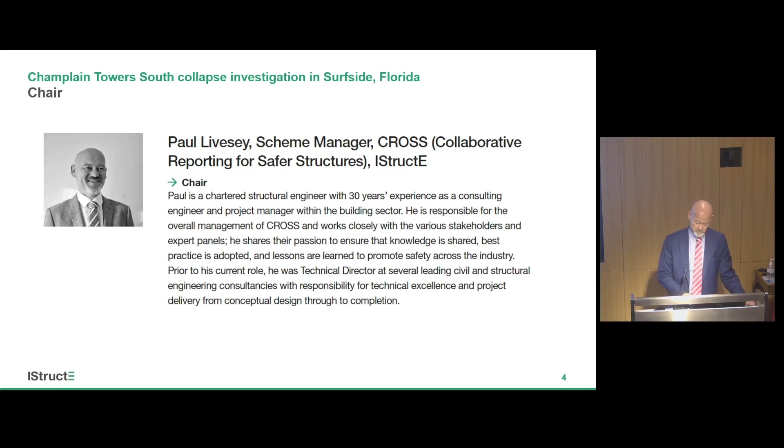CROSS is a confidential and secure reporting system that provides a route for professionals working with buildings and other structures to report the issues that they experience to enable lessons learned to be shared across the industry. At the heart of CROSS lies a strict no-blame culture, and we welcome reports about fire safety and structural safety issues, and these typically relate to concerns, near misses, and other incidents.

Our roots date back to 1976, and we were first established to identify in advance trends and developments which might contribute to an increased risk to structural safety. The CROSS scheme itself was first launched in 2005, and it's based upon the success of confidential reporting in the aviation sector. In response to the Grenfell Tower tragedy and the recommendations of Dame Judith Hackitt, the CROSS scheme was expanded in 2021 to include fire safety reporting.

This year, we were appointed by the Building Safety Regulator to operate the official voluntary occurrence reporting system that is required under the Building Safety Act.

CROSS receives voluntarily submitted reports which are then anonymised and de-identified to ensure that a reader cannot identify any product, location, company or person. The de-identified report is then commented on by our expert panels who use their experience to help professionals understand what can be learned from the report. Following a legal review and a review by the reporter, the report is then published for others to learn from.

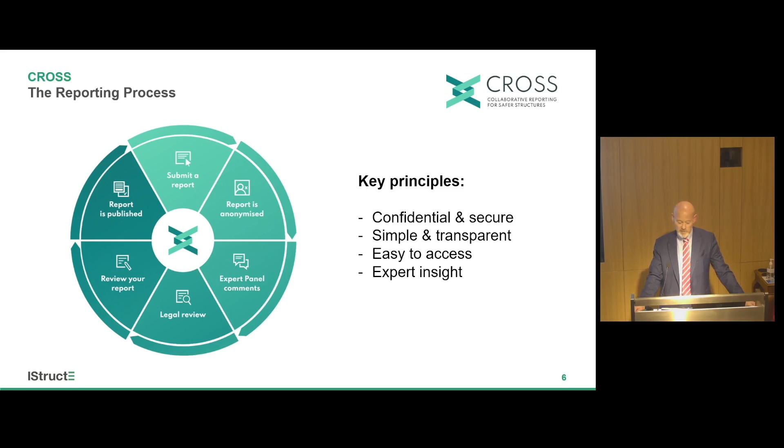We have over 700 safety reports that are freely available to view on our website, and we publish a quarterly newsletter that contains our latest reports. The receipt of a number of reports on a common theme could be considered as a precursor to a more significant event, and in these cases, we will issue a CROSS safety alert.

For example, over the years, CROSS has received a series of reports regarding balcony safety issues, and this, together with tragic events within the public domain, triggered the release of a CROSS safety alert. This alert highlights the common issues associated with the design, construction, and maintenance of balconies.

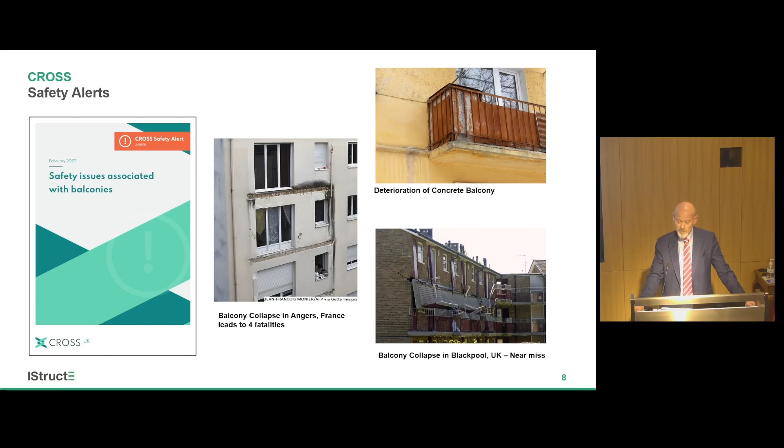Many issues that we observe also occur internationally, and CROSS promotes the sharing of lessons learned across our international network. We currently also operate in the United States and Australasia, and the country shown hatched is Germany, and the German Proof Engineering Association are currently in discussions with us, and we hope that they will come to fruition before too long.

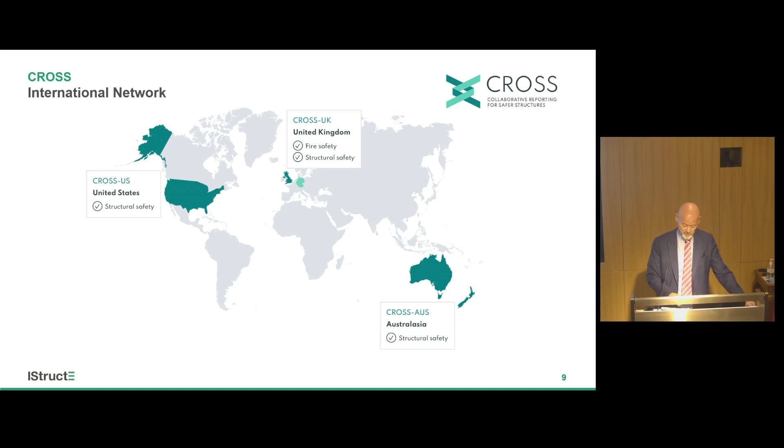So what are we learning from the reports that we receive over the 18 years that CROSS has been operational? I'm sure that many of these will not surprise you. The overarching lesson is that similar issues occur again and again.

There is inadequate communication, particularly at interfaces, and divided responsibilities. Tasks are being undertaken by those not suitably competent to perform them. There is ongoing concern about the degradation of older structures, coupled with a lack of maintenance. Changes in architectural or construction trends can have unforeseen consequences.

A poor understanding of computer analysis and design is a very common theme of our reports. There is a shortage of suitably qualified and experienced engineers, leading to safety-critical decisions being made by others. There is a lack of competent site supervision and inspection, coupled with inadequate quality assurance and checking. And added to the technical problems are the human traits of carelessness, corruption, and ignorance.

However, it is important to say that the vast majority of buildings are indeed designed and constructed safely.

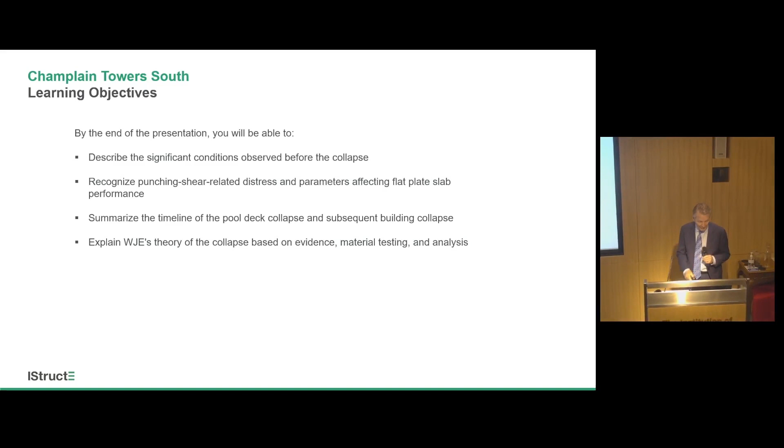By the end of the presentation, you should be able to describe the significant conditions before the collapse, recognize punching shear related distress, which may be very important, and parameters affecting flat plate slab performance, summarize the timeline for the pool deck collapse and subsequent building collapse, the progression of that collapse, and explain at least our theory as to the collapse.

If you permit me a brief commercial, I'm with Wiss Janney Elstner Associates. We're headquartered in Northbrook, Illinois, as Paul mentioned, but for about 7 years we've been in London. WJE is different than most engineering firms - our entire focus is on problem solving, usually based on instrumentation, testing, research, and detailed investigation. We're doing that same type of thing here in London.

I should also acknowledge our client. We were hired by the Condominium Association for Champlain Towers South through their attorney, Akerman, and Michael Goldberg and Brenda Radmacher did a tremendous job in that they helped coordinate the investigation for the civil litigation, because we had plaintiffs and other defendants all interested in carrying on an investigation, and the association was kind of in the middle of that, and they did a terrific job. The fees were ultimately paid by James River Insurance Company, and their attorneys were involved, Clyde and Company. We want to acknowledge them as well.

And also the WJE staff - I'm here representing them, including Matt Fadden, my colleague who really led this investigation. I took the initial call, but he's from South Florida and did a fabulous job, and there were a lot of man hours in field investigation, document review, structural modeling, and geotechnical consulting.

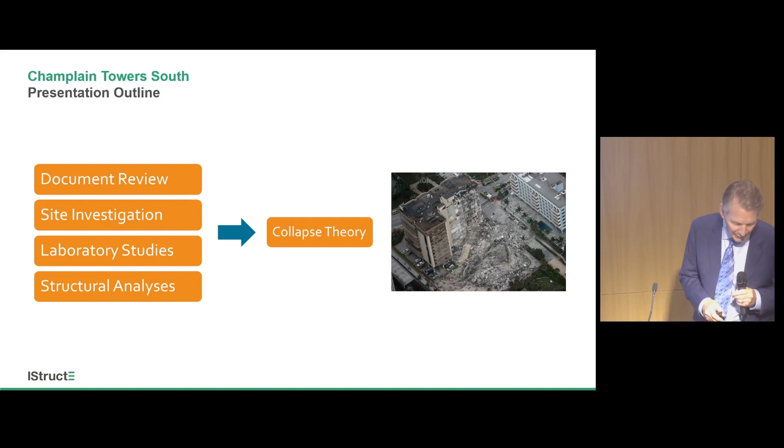Today's presentation follows kind of the steps in the investigation, right? Starting with document review - and that's not just construction documents, that's everything we could get our hands on, including photographs and other things prior to the collapse. A site investigation, limited laboratory studies, and structural analysis, all leading to a theory of the collapse.

All right, so let's start with document review and some background.

The building is in Surfside, Florida, north of Miami Beach, in that circled area—a very nice area becoming more high-end every day. As of the time of the collapse, on June 24th, we knew a building collapsed at about 1:30 a.m. About 100 people were feared missing or dead. The cause wasn't clear at that time, but there was a lot of speculation in social media, and a lot of information, including the permit drawings, was made publicly available.

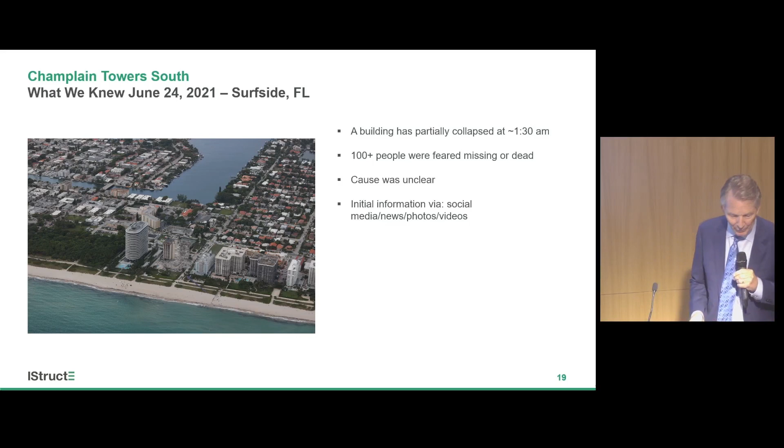The collapsed building is in the middle of that picture. To our left is 87 Park, and to the right is what's known as the Blue-Green Resort. I may refer to those buildings later in this presentation.

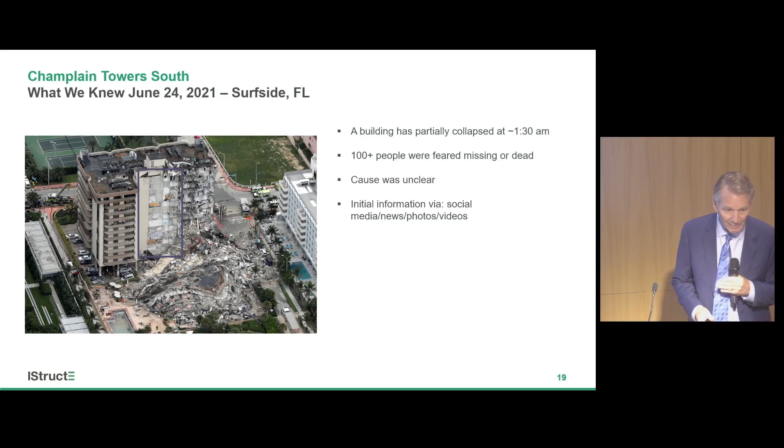The building was designed in accordance with the South Florida Building Code, the 1979 edition, which in turn references the 1977 edition of the American Concrete Institute Building Code Requirements for Reinforced Concrete, also known as ACI 318.

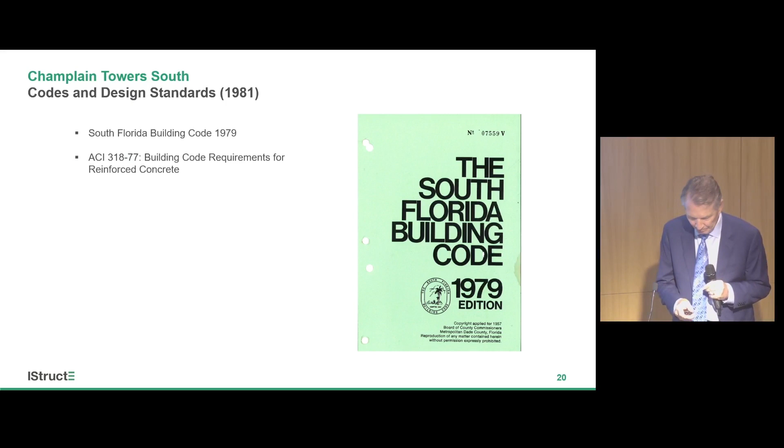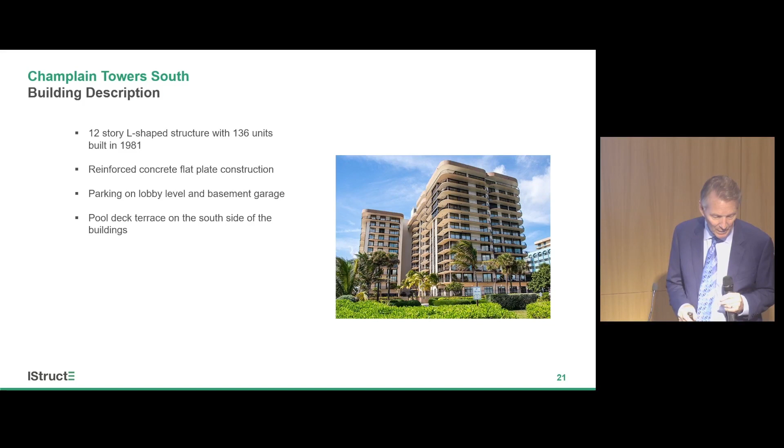The building was 12 stories, L-shaped in plan, 136 units, built in 1981. It had reinforced concrete flat plate construction—this is a shot of what we'd consider flat plate construction, a flat slab without drop panels or capitals. We define that as flat plate. I understand your definitions might be a little different.

There's parking at the lobby level and the basement garage, and there'll be more slides to explain that, but this shows the basement level garage, which covered the entire site, not just the building footprint. That's important to understand, and I'll show some slides on that.

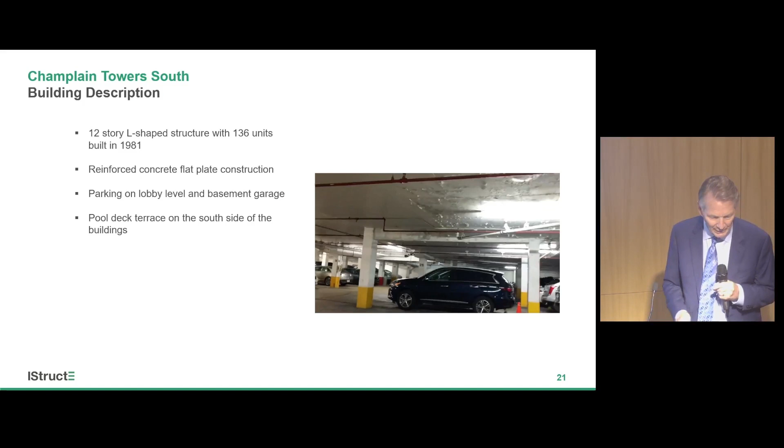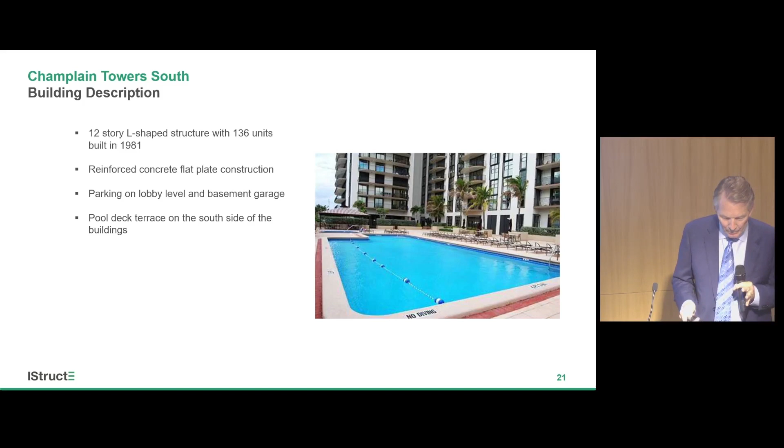That's the pool. It looks huge there, and it's a sizable pool, but the pool deck was much, much larger, as you'll see. The pool deck is where we're going to talk a lot about.

So there's an overall plan view. Collins Avenue to the west, the Atlantic Ocean to the east, and you can see the perimeter of the building and the pool and the deck surrounding that pool, okay?

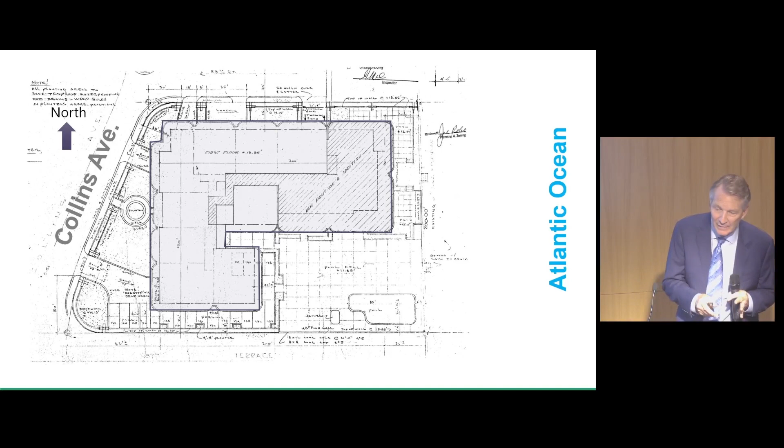If I take away the overlay, you can more clearly see that the building footprint was smaller than the site footprint. The next slide you'll see is one level down. There you see there's parking in the entire perimeter. So the pool deck is a supported slab, all right? Remember that.

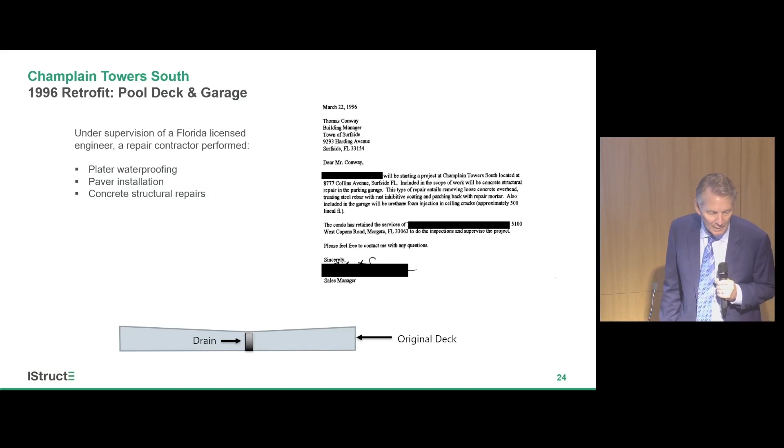As part of the review, we looked at the history of what went on in 1996. There were fairly significant activities where they added sand and pavers to the pool deck. There was an engineer who wrote a letter, but this work was primarily driven by a waterproofing consultant. The pavers looked great, but they added weight, and they also concealed to some extent any underlying structural damage.

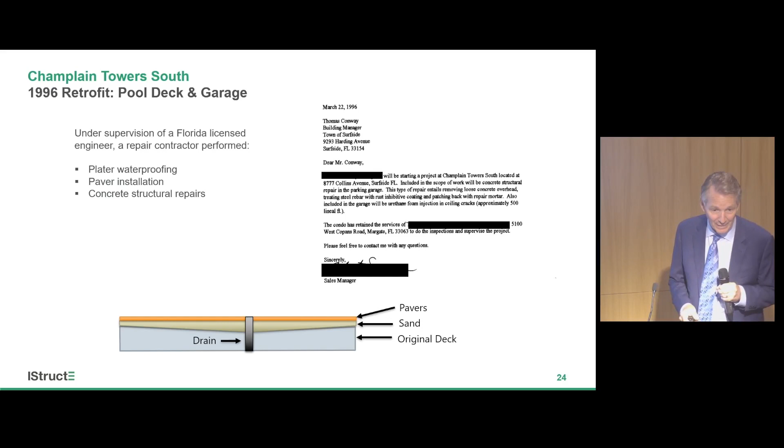In 2018, they began a recertification effort. In Florida, you have to recertify buildings after 40 years, which means you have to hire an engineer, they have to do an inspection, do repairs, and certify that the building is safe for continued use.

So we had the benefit of that completed report, even though the repairs were not completed. There was the usual mix of damage, as you might expect in a coastal environment after 40 years—abundant cracking and spalling in the garage, and previous repairs weren't holding up too well. A lot of concrete repair was needed, even in certain areas around the entrance along Collins Avenue, and even the pool deck slabs showing distress were recommended for removal and replacement.

I want to talk about the deck finish. One of the things the recertification engineers investigated was what was on top of this pool deck, because it wasn't entirely clear from the drawings.

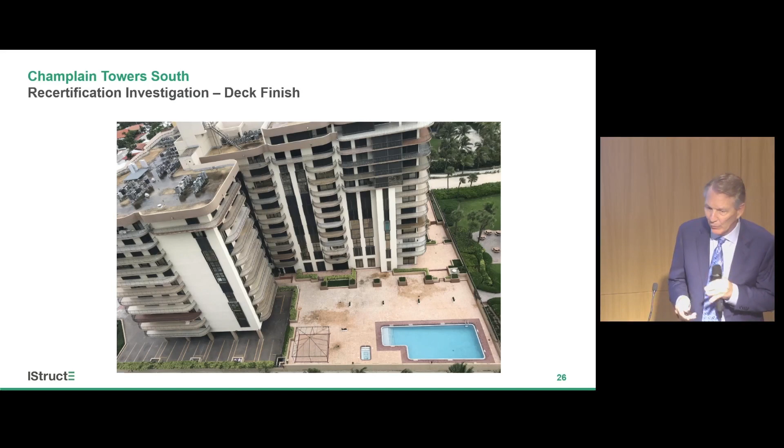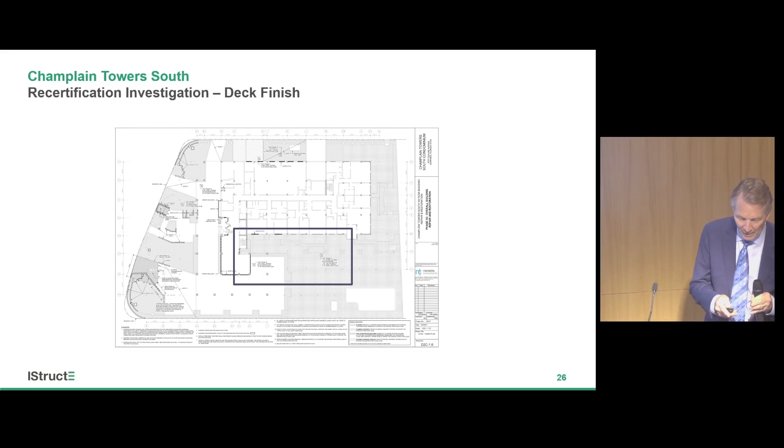So there you see the pool deck, and here it is in plan view, with a closer view of this portion. I'm showing it to you because they took cores, just two cores, but they were very valuable in understanding the nature of construction. One was through a parking area above the main subterranean parking, which had a grade level parking area - that's test core B. Test core A was through the pool deck itself. The next slide will show those cores.

A few observations on these cores. On the left is the core through the parking deck, on the right through the pool deck. What's missing from the pool deck core is the sand layer and pavers - they're not part of the core.

But the parking deck showed a topping slab more than 3 inches thick that was not shown on the original drawings. It's not clear if the structural engineer was aware of it. When I say original drawings, we think it's a permit set, so there was a possibility of changes down the line and even design changes.

Looking now at the pool deck slab, there was also a topping slab that was below the original tile and mortar, which was part of the original architect specification. So we knew that at least the construction team was aware that they were adding load in the form of a topping slab on top of the structural slab.

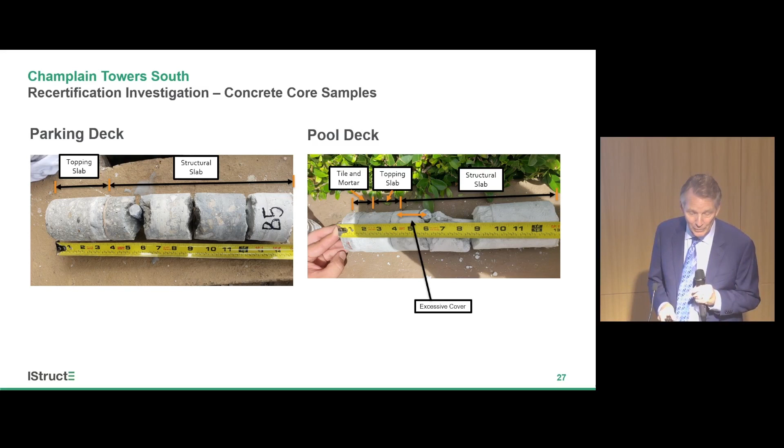The overall slab thickness was about right, but the rebar, not so much. There was excessive cover over the top reinforcement, which is not unusual in flat plate construction in our experience for various reasons. But that becomes very important too, when we get into a discussion of punching shear strength.

But what about this extra weight? By extra, I mean that's not shown on the permit set. In the case of the parking deck, they had some 90 millimeters of topping slab, more than 3 inches, that were not shown on the original structural drawings. And they had a 55 millimeter topping slab in the pool deck area, and on top of that, an additional 35 millimeters or so of pavers and waterproofing. So those items added weight.

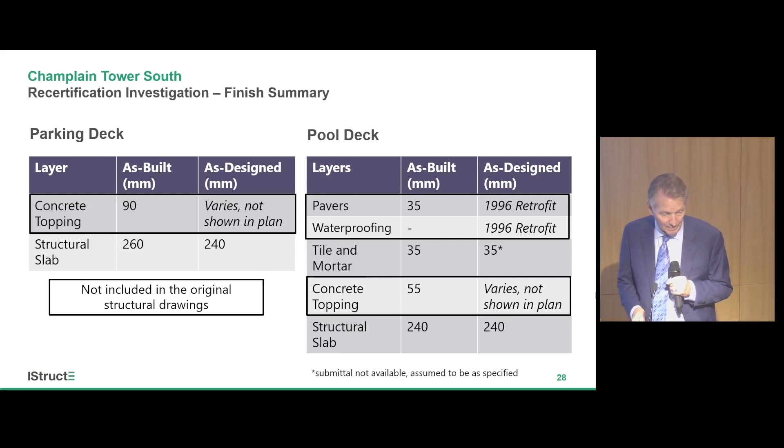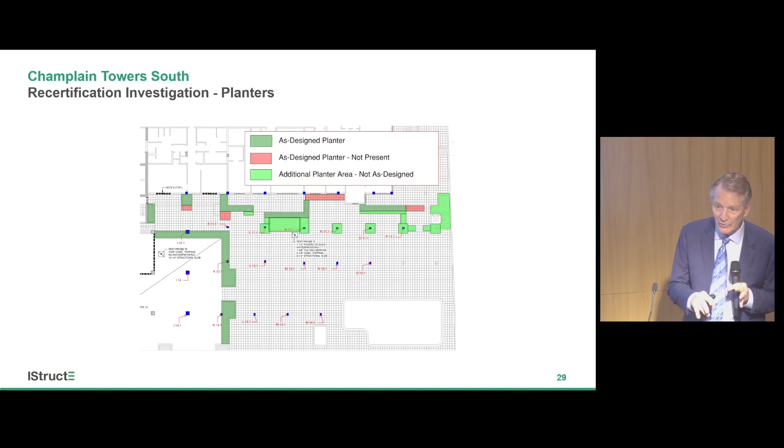And the planters weren't the same as shown on the original drawings. The planters shown on the original drawings and still in place are shown in dark green. As-designed planters that were not present are shown in a pink color, and added planters are shown in that light green color. So several planters were added compared to the permit set of drawings, which added weight in some areas, okay?

In looking through the mountains of documents, we came across some calculations that the recertification engineer did. Mostly in these recertifications, they do a visual inspection and fix what they can see is wrong. But at the entrance area along Collins Avenue, they were going to reconfigure the entrance, so they had a different drive pattern, different trucks could enter, so they needed to do some structural analysis.

So they undertook a frame analysis along column line T, a north-south column that you can see there. They looked at bending and shear for that area of the entrance, which is supported above the existing garage. The next slide shows their own output, and there were 10 supports along that line, and at the far right, it shows the results of the shear stresses at those supports.

And of course, the word exceeded appears in every case. So that was a clue, if you will, to the recertification engineer that there might be a punching shear deficiency at the grade level at this structure.

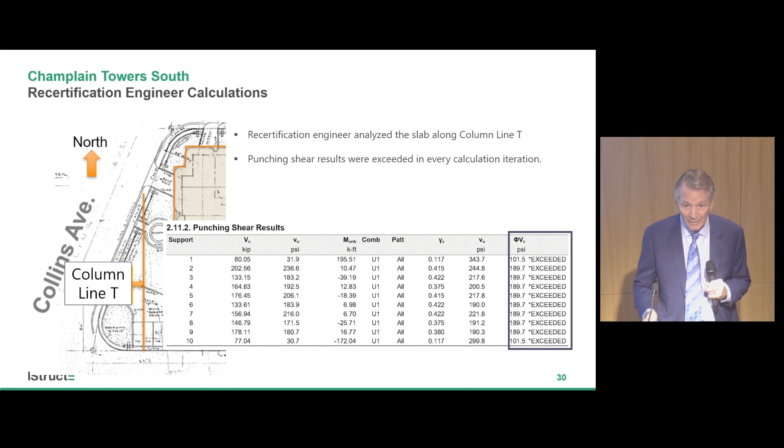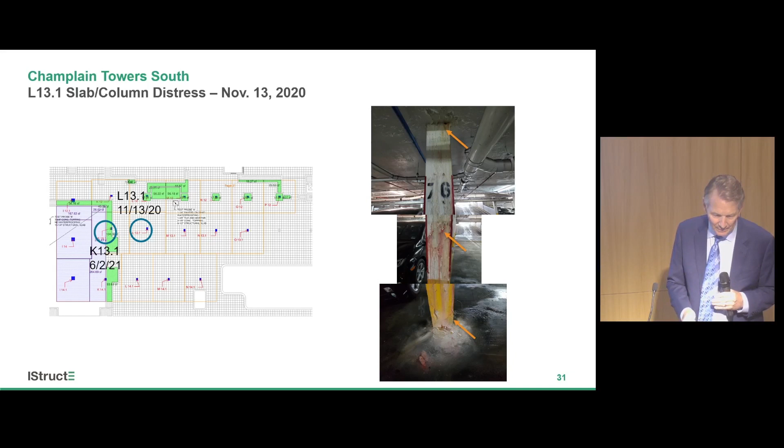It was column L13.1, and I want you to notice the mineral deposits at the base of that column. They're quite extensive, and there was evidence of a lot of leaks at the slab-column junction. The possibility is when there's more than just typical cracking - when you have cracking and punching-like distress - there's a pathway for water to enter.

In cases where you have exposure to water, accumulation of a lot of water might be an indication of a punching deficiency, and certainly an indication of cracking around the columns. But I'm not sure many engineers would fully appreciate that.

But if there was a smoking gun, it was when we discovered this picture. What you're looking at is the pool deck next to some planters, looking south, right above column K13.1. Those planters were constructed with concrete masonry units—what you might call concrete block, or cinder block.

The cracking pattern is consistent with distress of the underlying slab. You get a horizontal separation along the horizontal joint in those concrete masonry units, which suggests sagging of the slab, and there's a lot of deflection in this corner.

That suggests a problem with the underlying slab. The recertification engineer was aware of this cracking problem, but attributed it to something going on with the planters themselves, not the underlying structure.

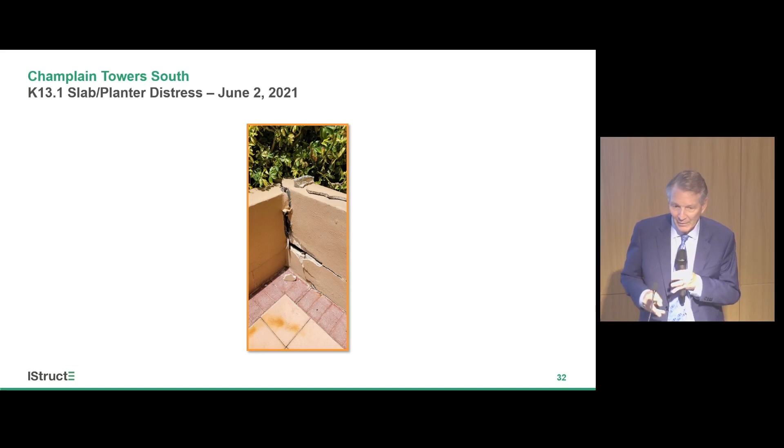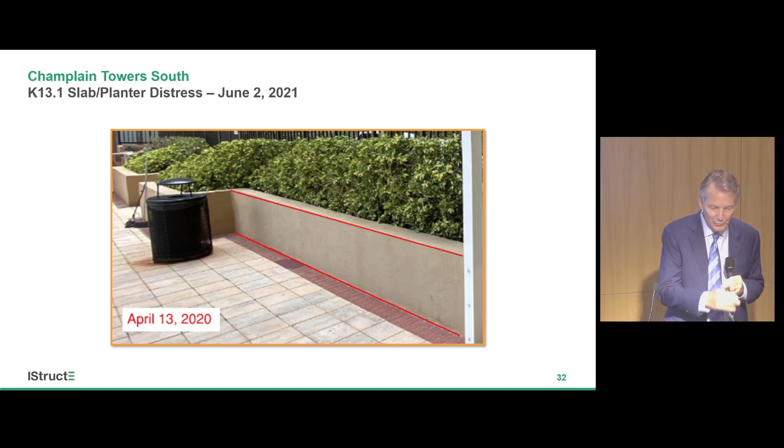What makes it more significant is we have a picture from a year earlier of the exact same location without that distress. So something happened between April 13th, 2020, when that earlier picture was taken, and June 2nd, 2021. Somewhere in that window, this distress occurred.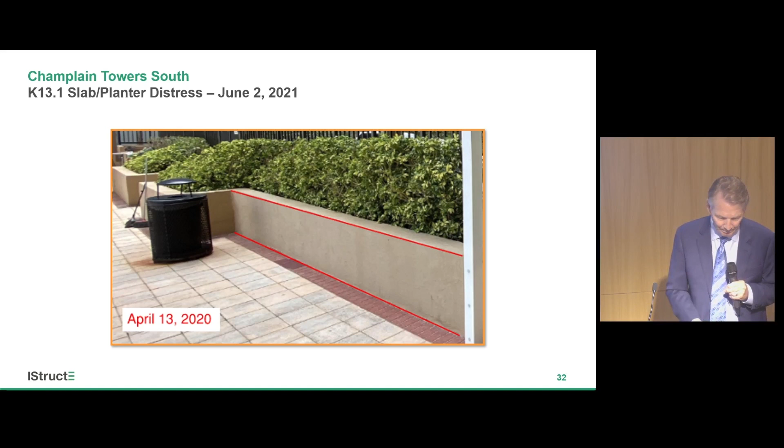Remember, June 2nd, 2021 was only three weeks before the actual collapse. This is a shot of the same area after the collapse—that green is the planter. You can see some of the concrete block units for the planter, and a column that had punched through the slab at that location. More about that later.

We knew some things from the video taken of the parking area. Remember, this parking area covers the entire site, not just the building footprint. To the right is the area below the pool deck, and to the left is the area below some of the units. You can see evidence of moisture penetration extensively in that area to the right.

Also note there's a change in elevation. It's hard to tell, but the electrical and plumbing lines are a clue that there were actually steps in the slab at those locations. And that plays in, as we'll discuss.

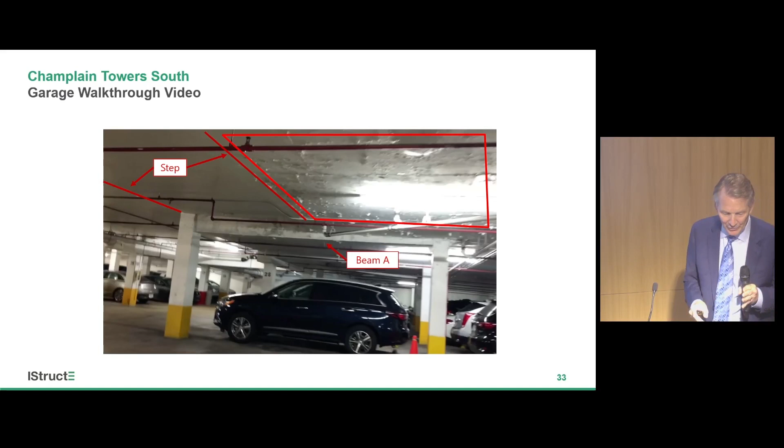I want to mention in particular beam A. To help deal with those steps, they needed a beam. So they put in these beam A's that transition from the building to the columns along the south side of the main building, if that makes sense.

We had some video—it's amazing how many things are captured on video. Remember I talked about the Blue Green Resort, to the north of this building? There were some guests there who heard or felt a whoosh of air come out through what was the entrance ramp to the Champlain Towers parking structure.

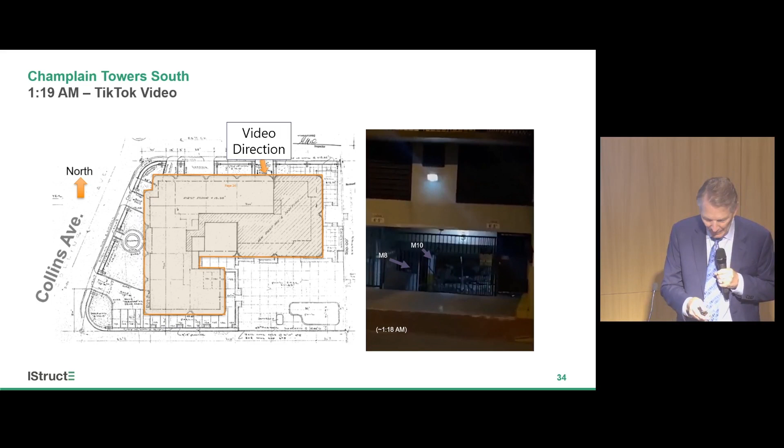So they got their video camera and took the shot shown at right. It's hard to wrap your arms around, but they're looking down the parking ramp underneath the building and into the pool deck beyond. When you enhance that photograph, you see the building is standing, but something terrible had happened to the pool deck area beyond—a lot of collapsed debris, possibly failed columns, and so on. So we had that video evidence.

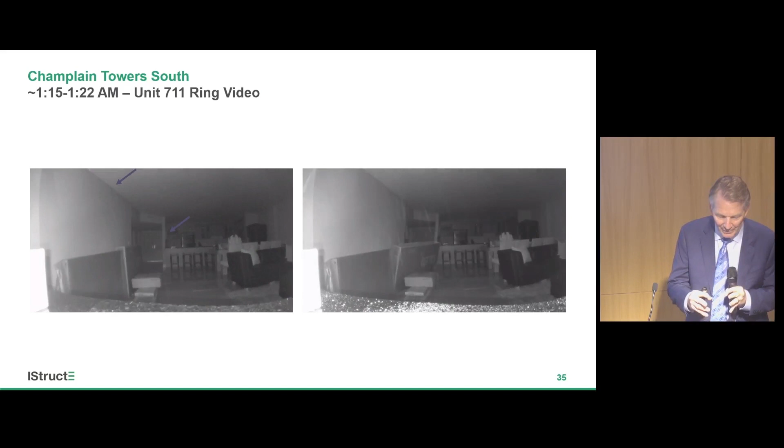We also had evidence from a ring video at Unit 711, and I'll explain where 711 is. This ring video picked up motion around 1:15 to 1:22 a.m. showing severe distress in Unit 711, but it's not collapsing at that time—it's just showing a lot of distress. Something went on, and we'll explain that later.

So that's where Unit 711 is—above, on the south facade, at the junction between the pool deck and the building. In Unit 611, residents reported cracks in the walls and escaped, as did those in Unit 111, who also got out safely. They were right at what we believe is the initiation point of the collapse of the tower itself.

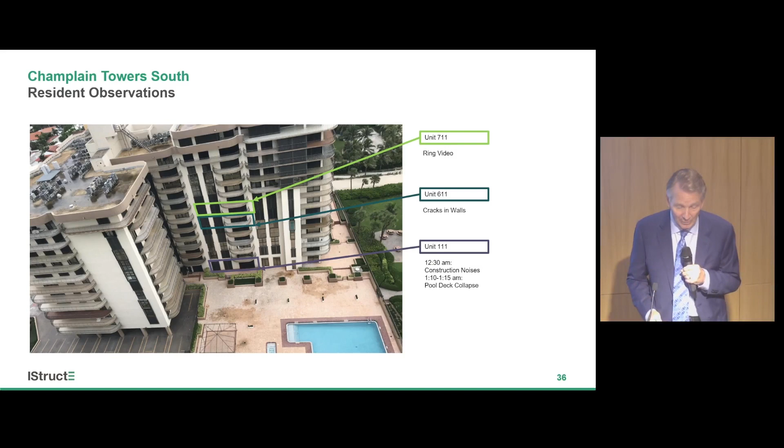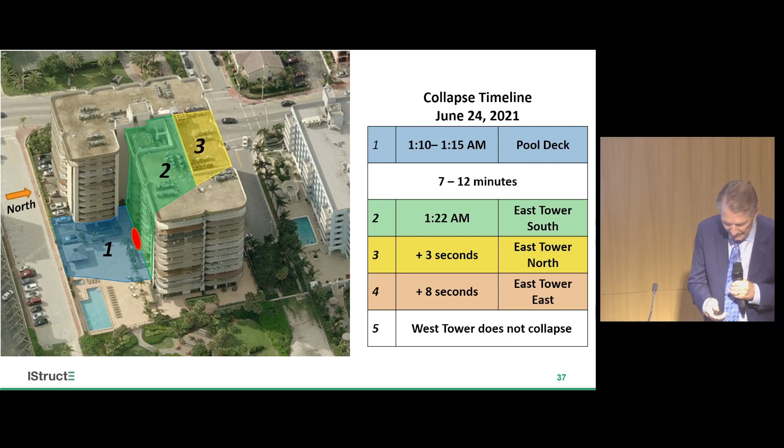So we could reconstruct a bit of a timeline from all of that, color-coded here. The pool deck collapses sometime between 1:10 and 1:15 a.m., based on eyewitness reports, 911 calls, those kinds of things. Then there was a gap of some 7 to 12 minutes before the south portion of the eastern tower collapses, beginning at the bottom, which we know from a video taken from a neighboring property. Three seconds later, area 3, the north portion of the east tower, collapses. There was a delay of about 8 seconds before area 4 folds in on top of areas 2 and 3. Area 5 doesn't collapse - there's a shear wall between the east and west portions, so the west tower does not collapse. Keep that timeline in mind.

We were eventually allowed access to the site after a frustratingly long period of time. Initially, appropriately enough, the Miami-Dade police department took control. It was a crime scene, and they didn't even allow the NIST investigators on originally, and certainly they weren't interested in any consultants coming on behalf of the litigants. So we weren't able to get to the site until October or so, and at that point they demolished the west tower and cleared the site. So this is what we had to work with in terms of a site investigation.

But it was still very valuable, and one of the first things we did, with the help of our client, was organize a joint testing protocol, so that all these defendant parties and plaintiffs, who all wanted to do testing, agreed on just doing it once. We hired a firm to coordinate all that.

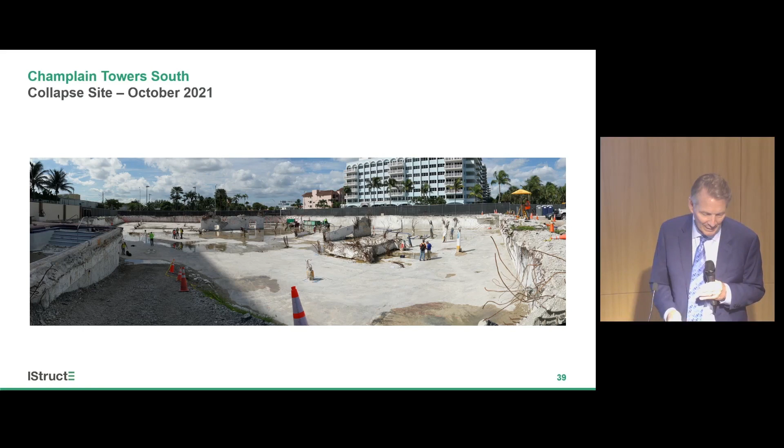One of the first tests we did was an elevation survey of the lower level slab, because there's a lot of speculation in South Florida, due to the karst formations, that it was a foundations problem. There are contours there, but those contours are in inches, and there's just not a lot of difference in elevation across the building footprint, particularly not very much from column to column, such that subsidence of individual columns was not indicated. There is a low spot in the southeast corner, but there was a sump there for the lower level slab, so it was sloped to drain. So we didn't really see much indication of foundation problems.

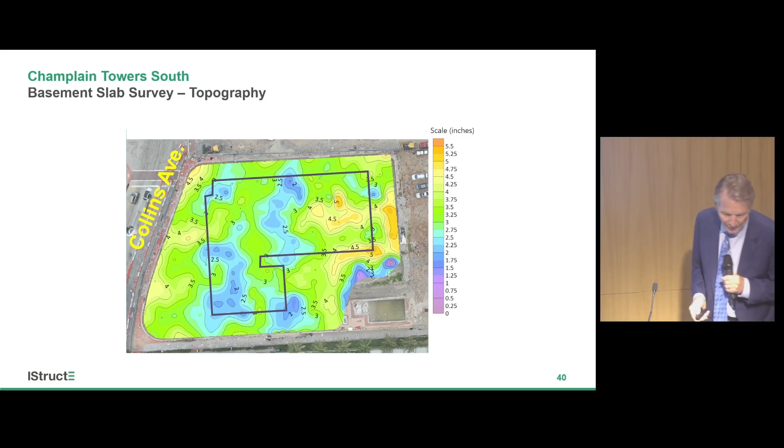We did extensive geotechnical investigation and didn't uncover any such evidence, along with sampling of concrete. We took samples of the concrete and the reinforcement, as shown here, and even did things like openings to look at waterproofing and the like.

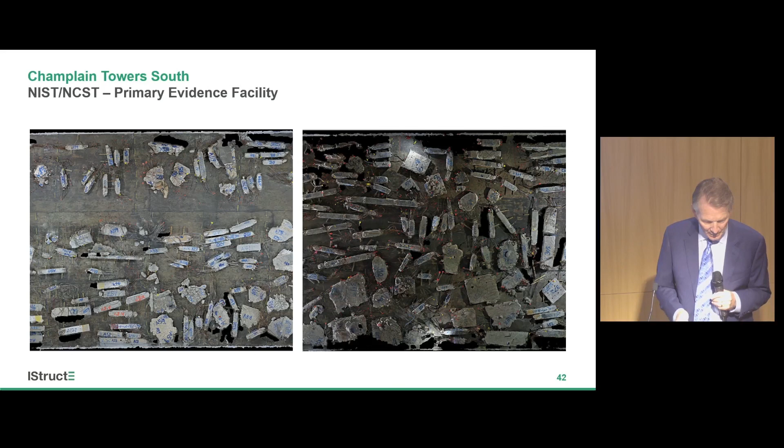In the meantime, the evidence was collected by the police department in cooperation with NIST and stored in a warehouse out near the airport - these are the pieces they collected. We were finally allowed access to look at these pieces, and we flew our drone and merged the photographs together to get a collection of all the pieces. They all had numbers on them, but nobody had correlated the numbers with the location in the building. So we had all this evidence, but didn't know specifically where it was from. That was a challenge.

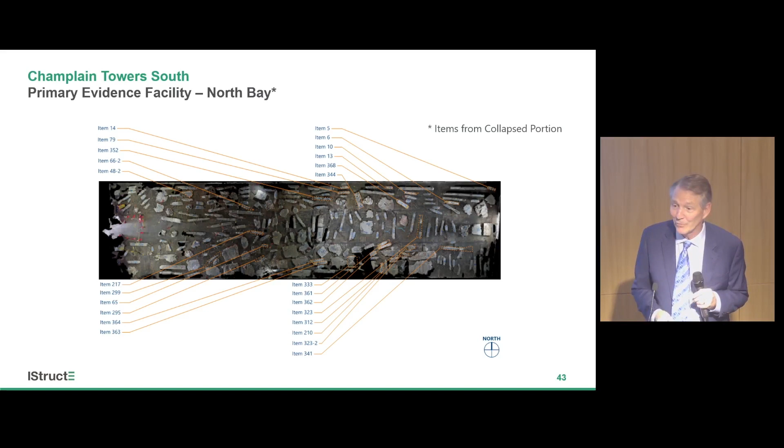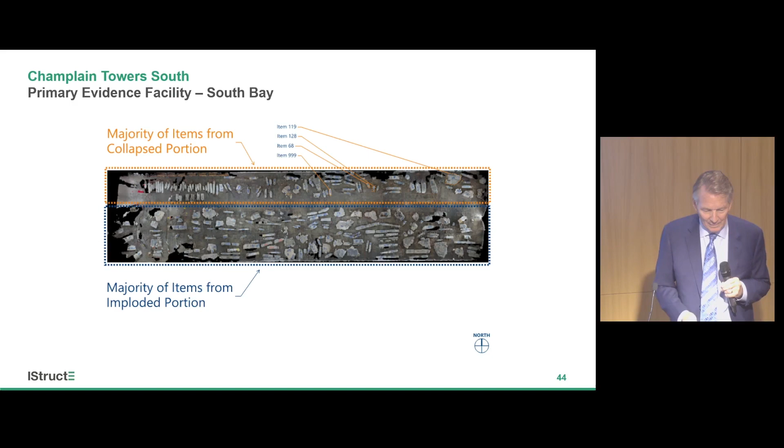I think NIST kind of knew, but what we heard was, rather than give you the wrong information, we'll give you no information. But we did learn some things. They also saved some pieces from the imploded portion of Tower South in a separate part of the warehouse, which is shown there. This is one of the most important pieces.

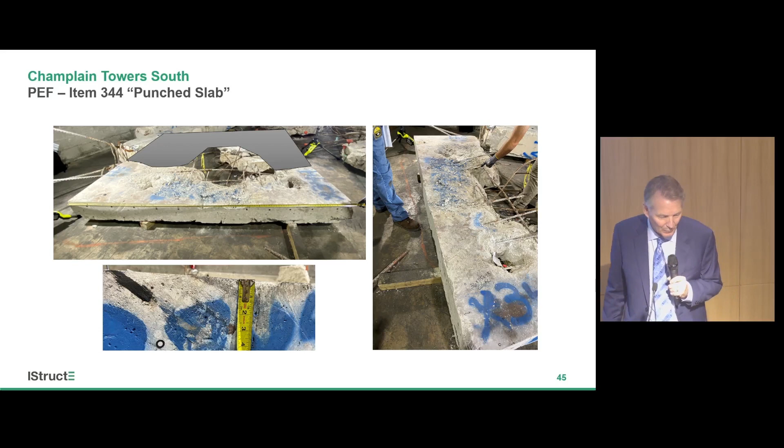We could recognize it as a pool deck column based on its various characteristics. There was no column above, and there was an apparent punching failure - you're seeing kind of half of it. If I complete that area around the column, it would look something like that, with a punching failure right in the middle. A couple of things I want you to note: not a lot of reinforcing.

What reinforcing was there was a little bit too deep, just like we saw in those core samples. It was 2.5 inches to what was the bottom layer, and if you superimpose where the top layer should be, it was about 1.25 inches - let's say 30 millimeters or so - of excess cover. As you will see, that's important to punching shear resistance in Eurocode as well as in the ACI code.

And they recovered some columns that were clearly pool deck columns, and some of those even had the parking numbers on them, so we could identify where they were from. That was helpful.

And that failure pattern, in our view, was consistent with a punch-through failure of that column.

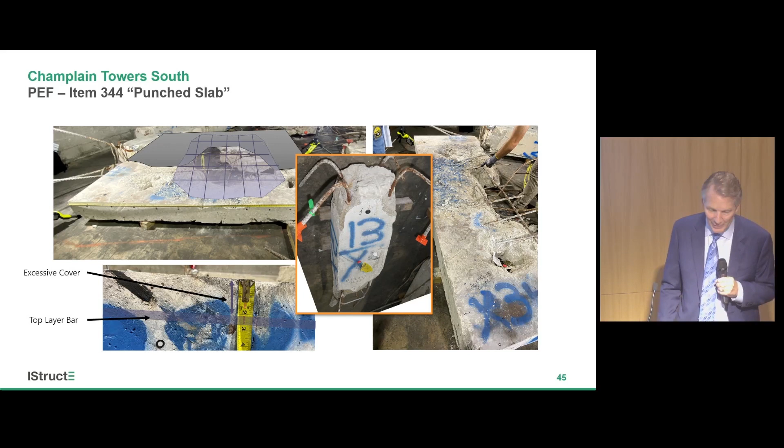We were very interested in beam A. Remember, that's where they used a beam to help facilitate these steps in the slab, and thought that would be a real hint as to how the collapse progressed into the main building. The beam A's were pretty much destroyed. You can see one example, but all we could do was confirm that the reinforcing was consistent with that shown on the drawings, but we don't know how much damage was due to the collapse itself versus pre-existing damage.

And likewise, certain columns into which beam A framed were found, not in the critical area where the collapse initiated, but elsewhere between the building perimeter and the deck area. A couple of observations are important here.

First, as shown on the left, there's a huge chunk that has been pulled out of that face of that column. We've shown kind of where the rebar should have been, and it was pushed in quite a bit. One of the things about these columns: they were not all that big, and they were very heavily reinforced.

Nominally almost 7% reinforcement. But then when you splice 7% with 7%, you get 14% reinforcement. That's a lot of reinforcement in a column, and they didn't use offsets to splice them carefully, so they ended up with this excess cover, which made these columns vulnerable to those kinds of breakout failures.

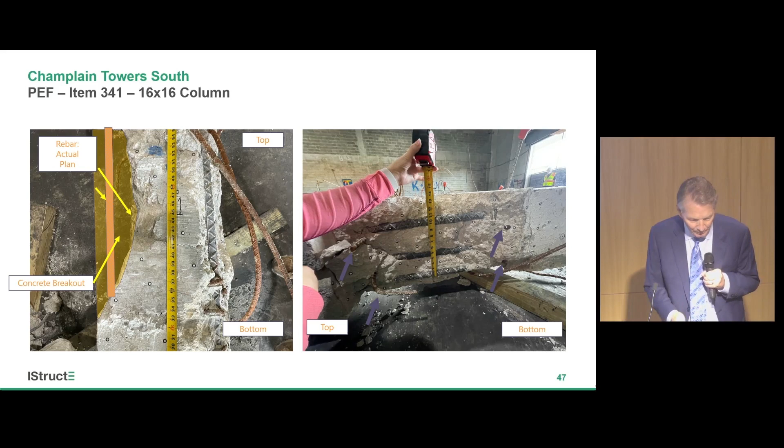Okay, now moving on to laboratory testing. This is from the Joint Testing Protocol. I'll just kind of go into the findings.

The concrete was typical to Florida. Moderate water cement ratio, well mixed, not air entrained, which was not unusual for South Florida. The corrosion of the reinforcement was consistent with that at placement. In other words, you put these bars out in South Florida and they rust. You put concrete around them and they stay rusted. But we didn't see much corrosion beyond that. Even back to that slab sample I showed you, you didn't see characteristic delaminations that you might get at a top mat, for example.

And the chloride levels — these are mostly samples from the basement slab, not from the pool deck slab — but they were very low. You see the carbonation front in the photograph to the left, and it wasn't terribly deep. So nothing from a materials standpoint stood out.

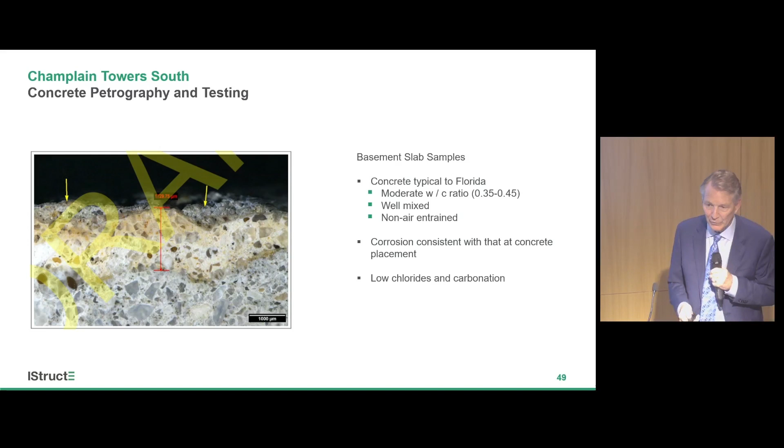We did have a chance to test cores, some from the pool deck, where the average compressive strength was 30 newtons per millimeter squared, which exceeded that specified, not by a large margin. Concrete can gain strength over time, but it certainly didn't indicate that concrete strength was a major factor. There were a couple of columns where the measured strength was lower, but we don't think that played a role.

And likewise for the reinforcement, the yield strength, ultimate strength, and elongation, which is how we evaluate reinforcement in the U.S. and I suspect here as well — all of them met those standards and came in higher by about the amounts expected for reinforcement.

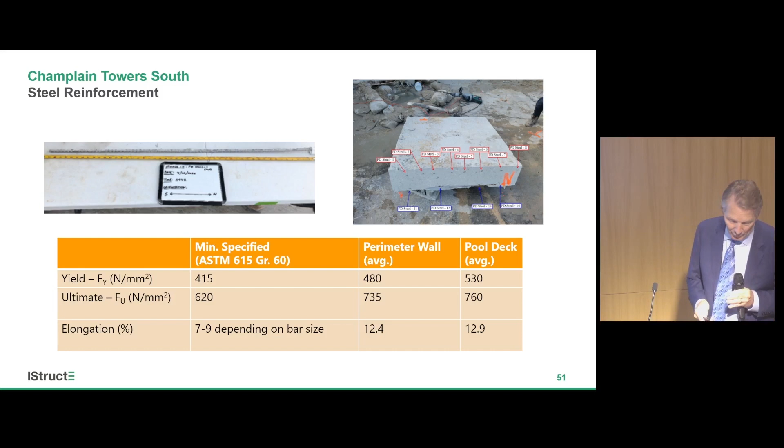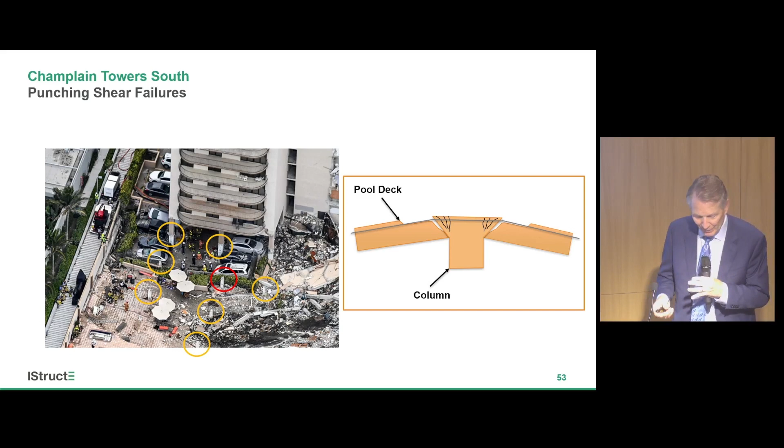And finally, structural analysis, and we want to dive into our friend punching shear. I've been talking a lot about that. I showed you this slide already of all of these columns poking up through the pool deck. When you say punching shear, we're talking about the kind of failure shown at the right, and that was the distress also indicated by this photograph — the smoking gun, as I called it.

In U.S. practice, punching shear is evaluated using the equation. I apologize for showing a complicated equation, but V sub C is 4 times the square root of F prime sub C, times a perimeter B naught, and an effective depth D, okay?

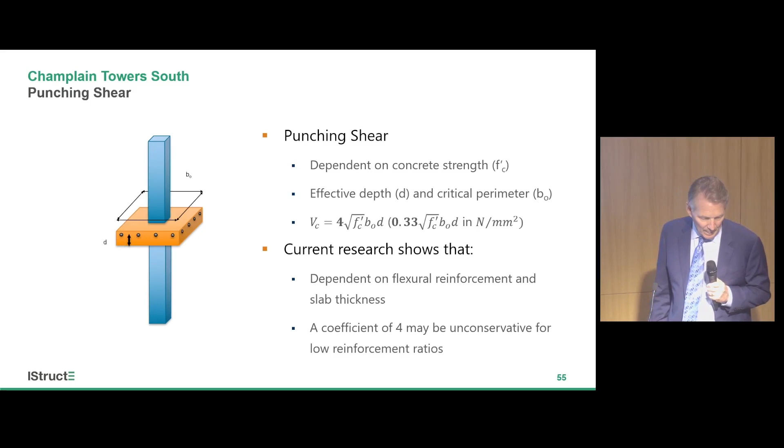So it's a function of B naught and the effective depth D with the coefficient of 4, and I've shown the metric equivalence, but it's an unusual equation in that the units don't work out right. I mean, you have a square root of pounds per square inch. It doesn't make any sense, but as long as you keep track of your units, it works out.

And again, in Eurocode practice, and I think the UK, you have different formulas for both the resistance side and even the location of the perimeter and so on. The results aren't wildly different, but your design equations are different.

One of the things we noted is that recent research, in the last couple of decades, has shown that that coefficient of 4 is dependent on flexural reinforcement. This shouldn't be a surprise to structural engineers - there's a relationship between shear strength and flexural strength. Muttoni did a lot of work on that, and he talked about flexurally driven punching failures, where the coefficient could be much less than 4 when there isn't very much reinforcement. This was a case in point - they had very little, very light top reinforcement. In fact, they had deficiencies in flexural strength, okay?

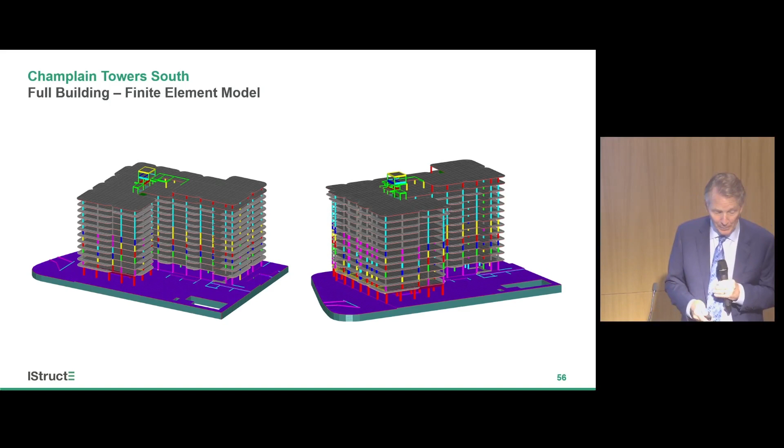We built a finite element model to verify the forces acting at all of the elements of the structure and used it for various purposes in the investigation.

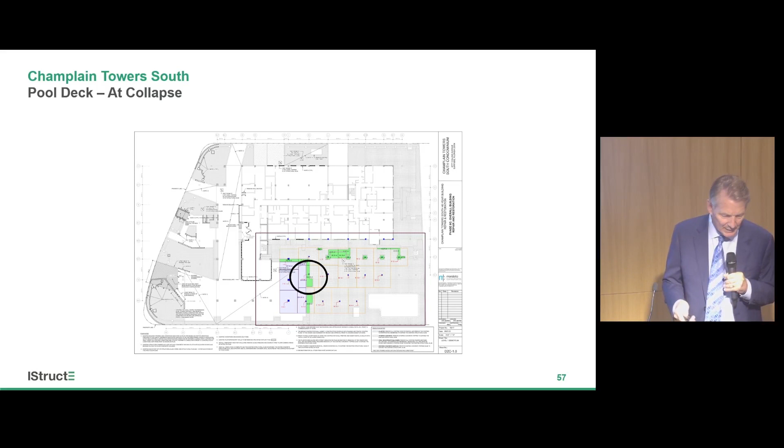So we want to focus in on this column K13.1 where I showed you that they had the distress earlier, right? This is kind of a simplistic structural review in this particular case based mainly on tributary area, but the resulting shear transfer was very consistent with that finite element model I showed you, right?

And in any investigation, it's important to look at the quality of design and the adequacy of the design, but also the conditions at the time of the collapse. One is to evaluate, was there a design mistake? The second is to better understand, does the collapse make sense, right?

So focusing on the as-designed numbers for this column K13.1, you see the column size there is 400 by 300 millimeters, the specified strength, the clear cover, and what we call factored load, right? When you design for punching shear, you factor the dead load by 1.2 and the live load by 1.6, and so you get this factored load. And you take the strength from the 4 roots of F prime sub C and multiply that by a strength reduction factor. That's a partial safety factor similar to the materials factor that you use, but it's meant to take into account other effects.

So what you find when you do that evaluation is that the demand, the factored load, exceeded capacity by 72%. So it was way under-designed at that particular column, and others were similarly under-designed.

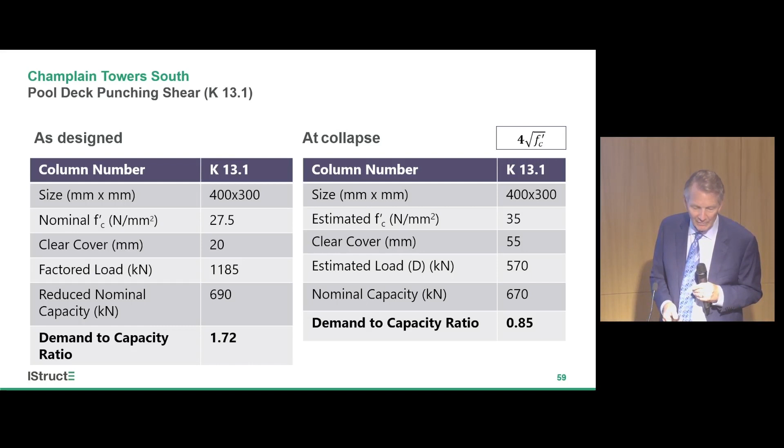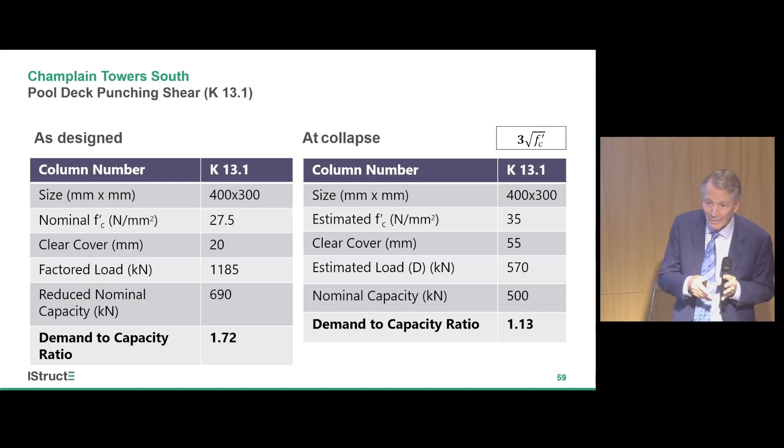Now at collapse, we have a very different condition. We don't have any live load, right? The actual strength was a little higher. The clear cover was higher, so the effective depth was lower. And so when we get done with all that, we have the demand is not quite as much as capacity - it's only 0.85, but that's using a coefficient of 4. And remember I talked about light reinforcement, and that maybe a coefficient of 3 is more like it. So if you use a coefficient of 3, you find that demand exceeds capacity by about 13%. So I think between the light reinforcement and the extent these design codes can predict the strength, that explains the collapse - the collapse in the absence of live load.

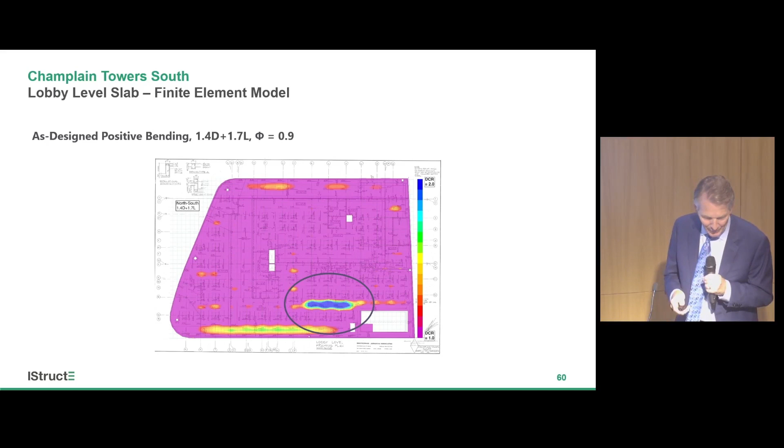So all that leads to a theory of collapse. And I have some slides here that kind of illustrate this theory, but I want you to try to follow along. The pool deck to the south of the building fails - we know that from the video site observations - that this whole thing started with a punching shear failure. And as it fails, it applies horizontal forces to the building columns, and I'll show you an illustration of that. The forces are due to both bending and catenary behavior. And the detail due to the step in the slab somewhat diminishes the strength and makes it vulnerable to progressive failure.

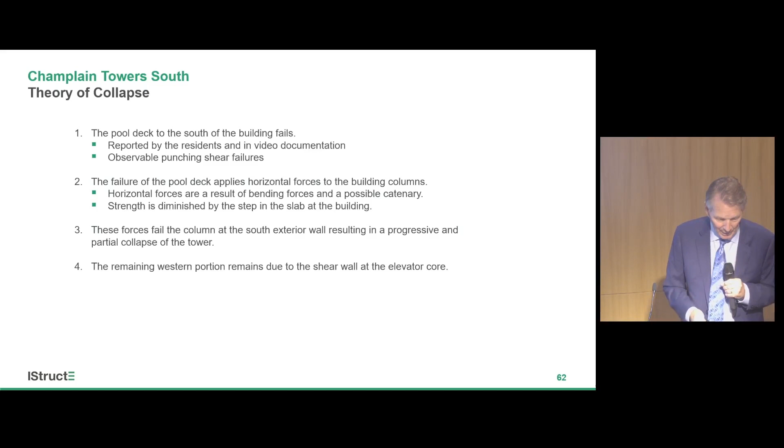So these forces fail the column at the south exterior wall of the building, resulting in progressive and partial collapse of the tower, specifically the east tower. The remaining western portion remains because the collapse was arrested by the shear wall. Let me illustrate that theory.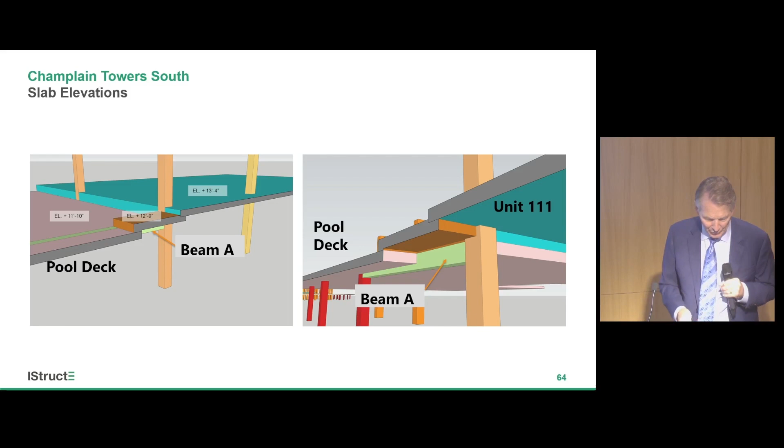Here we are again looking at the pool deck along column line K. The next slide shows a 3D view of the framing at that location. I've shown you this before, where beam A frames into the building to the right in blue, and the pool deck to the left in a pinkish color, with beam A shown in the framing detail. I want to illustrate this a different way: this is a cross-section view looking west through the pool deck and a portion of the building, including column line 9.1, where beam A frames into the building.

And remember the planters? I showed you that before April 13th, 2020, there really wasn't much indication of distress in the planters. Shear and flexural cracks were highly likely, we think, in the slab-column junction regions, but hadn't manifested yet. That's the photograph before April 13th, 2020.

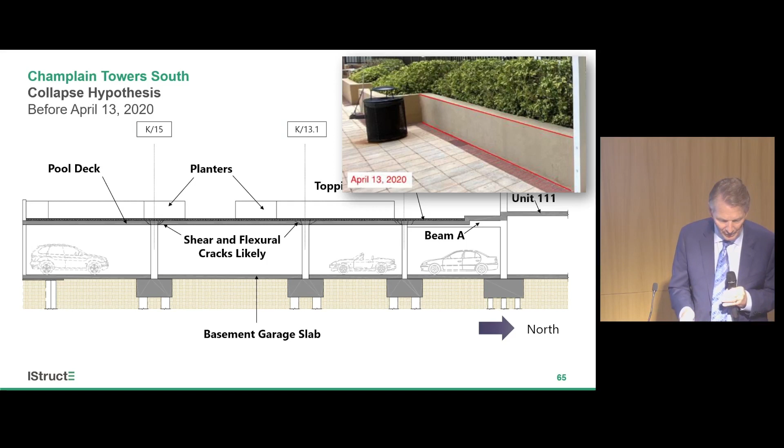But sometime after April 13th, 2020, and before June 2nd, when this photograph was taken, something happens at that particular column that causes the slab to sag, producing horizontal cracks and faulting at the reentrant corner, consistent with sagging of the slab and concentrated rotation at column K13.1. That's bad, and it hung on there for at least three weeks or so.

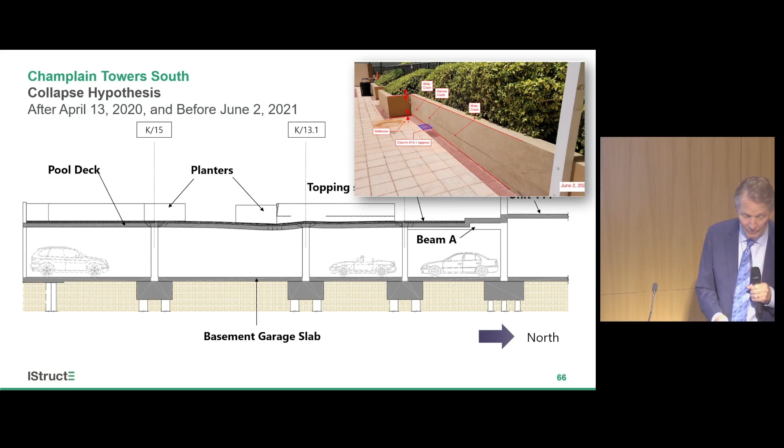Then a punching shear failure developed. We're not certain it started at K13.1, but it's the most likely candidate because it was the most heavily loaded and showed indications of damage in the photographs before the collapse. So that's a likely suspect.

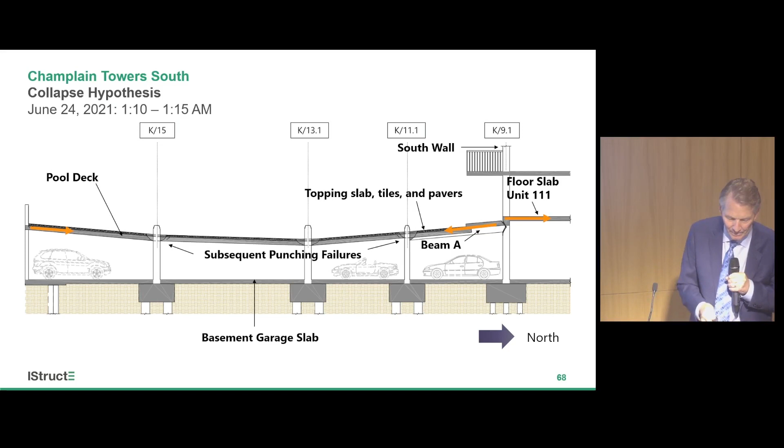So when that happens, what happens next? The adjacent columns pick up a lot more load, and they fail almost instantly in punching. Several columns fail in punching, and beam A drops, experiencing both catenary forces pulling and bending forces, where the top portion of the beam pulls on the columns along line 9.1. Then the pool deck collapses.

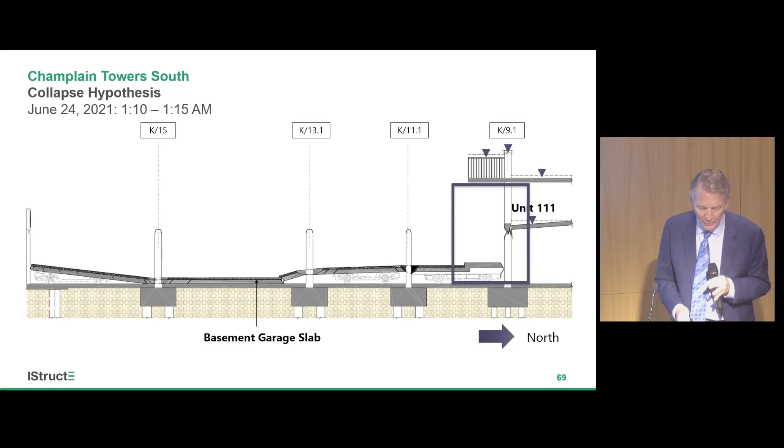And as we've seen in the videos, there were indications that the building in the immediate area around K9.1 also sagged somewhat, dropping a little bit. So the next few slides concentrate on that area.

This is the detail of the beam A connection to the south building columns. Imagine a shear force and a pulling force on beam A—that's going to pry out that chunk of concrete. We showed you a picture of that, and the vulnerability to that breakout failure was exacerbated by the fact that, in the case of the one column we saw, the reinforcement was moved over to accommodate the splice.

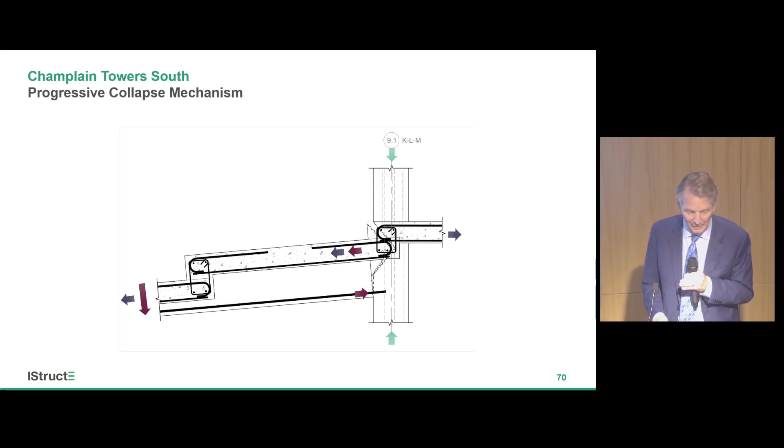So when that happens, the building drops—we think it dropped several inches and held. It held for 7 to 12 minutes or so before the building collapsed. But concrete strength is time dependent, and after those 7 to 12 minutes, the columns give up the ghost, and the east portion of the building collapses.

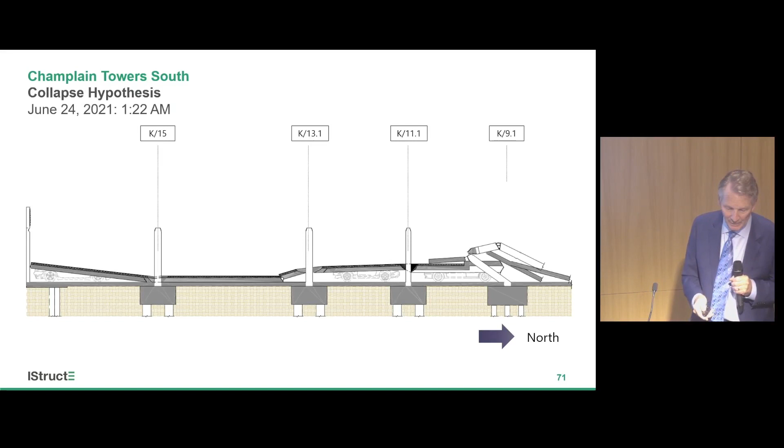So what mistakes were made? First and foremost, the pool deck slab was inadequately designed by a factor of almost 2. There was also excess weight—they added pavers, sand, and an overlay that may or may not have been accounted for in the original design. We know the design was deficient by some 72%. The top reinforcement was too shallow, so you lost effective depth. Those first three were the main deficiencies that contributed to the collapse as regards the original construction.

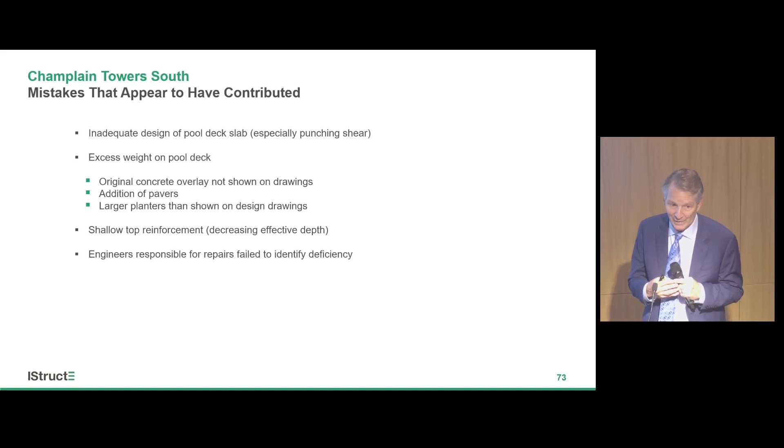But we couldn't help but note that the engineers responsible for the recertification failed to recognize some of the warning signs—the smoking gun, as I called it. So those mistakes appear to have contributed. But were there other factors? We think so—first and foremost, sustained load effects.

You take a concrete cylinder and it breaks at 4,000 PSI. I'm sorry for the English units again. They are, after all, English units. We got them from you. We just...

But load that same cylinder at 3,000 PSI, it may eventually break due to micro cracking and creep, right? So concrete is weaker under sustained load, and this particular structure had sustained loads near the limit for some 40 years.

The low top reinforcement ratio — I don't mean the reinforcement itself was shallow, we're talking about the ratio of reinforcement. There weren't very many bars concentrated around those columns, and that there should have been. That's been corrected in current codes, at least in the U.S., requiring a greater concentration of reinforcement in that vicinity to address that flexurally driven punching failure, if you will.

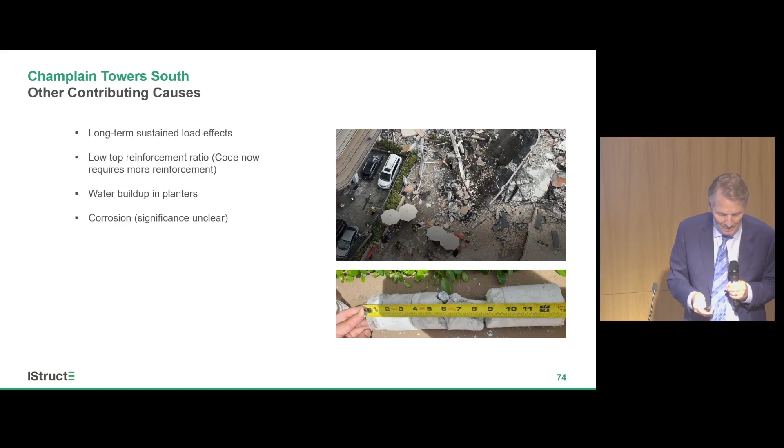Water buildup in planters may have been a factor. We couldn't rule out corrosion. We didn't see evidence that it was significant in the few samples we were able to examine, but we didn't examine everything, right? So that's also a potential contributing cause.

The county appointed Judge Hanzman to serve as the judge in the civil litigation, and he did a phenomenal job, bringing sides together to try to get, if nothing else, at least swift justice for the plaintiffs. Some 98 people lost their lives, and in the end, the case settled for $1 billion from various defendants, plus another 120 million from sale of the property.

A huge verdict, whether it's justice is a different story. The original designer and builder weren't around, but they found other defendants that contributed. From a legal perspective, very successful in that it got wrapped up quite quickly with a pretty satisfactory judgment, at least from the plaintiff's point of view.

So what should we do going forward? It goes to what Paul is trying to do with Cross, and we just have a few thoughts about that. In our current practice, there have been changes to the ACI code that address some of the problems, particularly the concentration of reinforcement. I think this case emphasizes the importance of what we call peer review for important buildings, that a second engineer take a look.

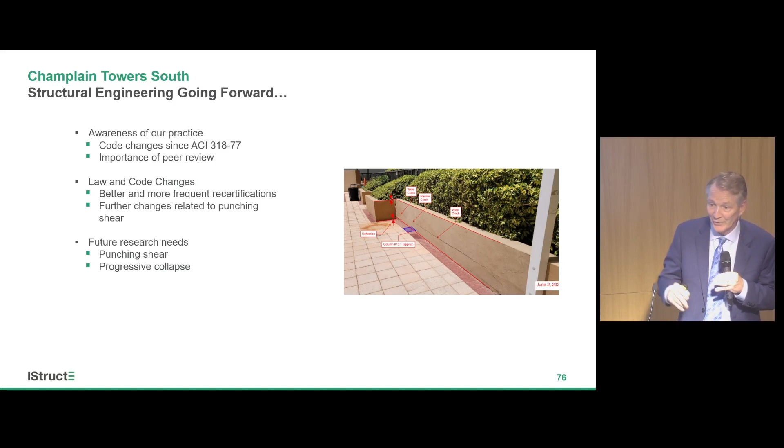The fact that the reinforcement was low was not unusual in our experience. It happens fairly frequently, and maybe there needs to be tougher standards around that. Think about it — this top reinforcing is supported on chairs. The construction workers are walking all over it and then pouring concrete on top of it, and you really can't see if it has sunk further. Or maybe they used the wrong chairs. We don't know.

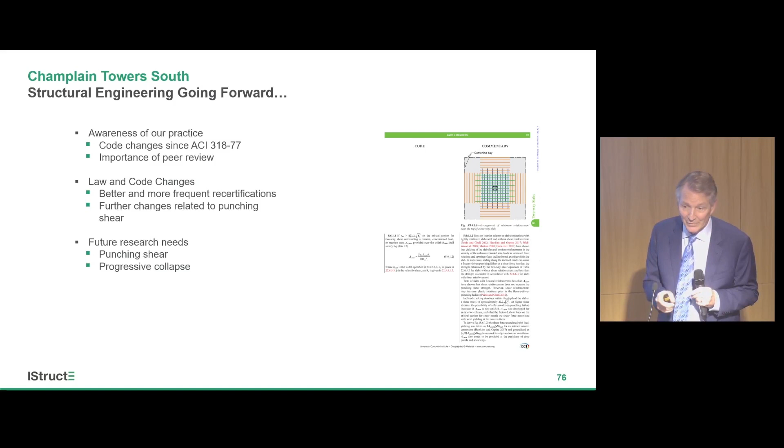There's probably some future research needs as well to better understand punching shear resistance and progressive collapse. Paul and I had a conversation around that, and that's a tough thing to codify, but it's unfortunate, maybe unconscionable, that the collapse of a pool deck, which at 1 in the morning would have gone without injury to anyone and they could have recovered from, progressed to a building collapse. Anticipating that is hard, but I think this case is going to focus more attention onto progressive collapse and other research related to punching shear.

And that's all I have.